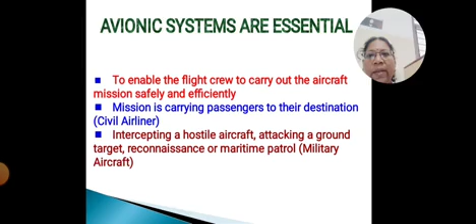If it is a civil type, what may be the mission? Mission means when you are taking that aircraft - if it's a civil aircraft, we have to carry the passengers very carefully and safely land them at a destination. If it is a military aircraft, it means intercepting a hostile aircraft, attacking a ground target, and we have to safely reach our target also in any weather condition. That is essential for this avionics system.

What are all the major drivers in the development of an avionics system? It is to meet the mission requirements with the minimum flight crew, we have to go for this avionics system.

What is that minimum flight crew? Suppose if you are having a civil aircraft, we know there will be a pilot and a co-pilot. If you are having an avionics system where a single pilot is enough to control the entire aircraft, that is an economic benefit - we are saving the salary of a crew, as well as reducing the training cost for another crew member. So we are reducing the cost and getting economic benefits.

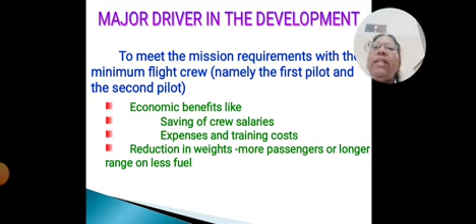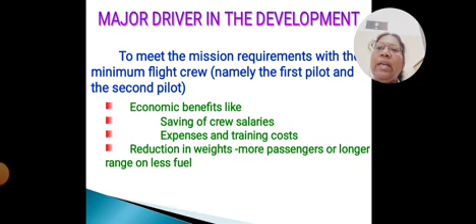Then we are reducing the weight of the flight. How? Since we are using electronic components instead of mechanical components to control the aircraft, the weight of electronic components is very less compared to mechanical components. Using that saved weight, we can take more passengers and reduce fuel consumption. That is the major driver in this one.

Then if it is a military type aircraft, a single seat fighter or strike aircraft is lighter. Since the weight of the aircraft is light, we can carry more weapons with this one, so its cost is less compared to a two-seat aircraft. Also it eliminates the second crew - so the second crew's training as well as salary can be reduced.

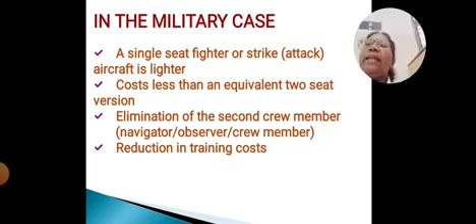Next, other important drivers of our avionics systems are increased safety compared to mechanical drivers. Here we are having an electronic system which gives accurate readings of our circumstance.

So we can safely land, and air traffic control requirements are comparatively less. At any weather condition, you can operate our flight, and it reduces the fuel consumption. It improves the aircraft performance, controls and handling, and reduces the maintenance costs.

So totally, the avionics system in the case of military helps us achieve our target. In the case of civil aircraft, we get benefits like reduced cost, and the economic benefits are more.

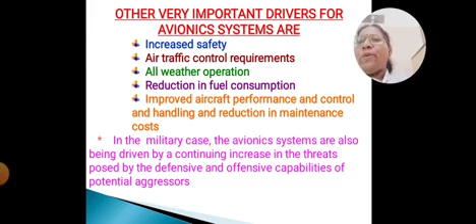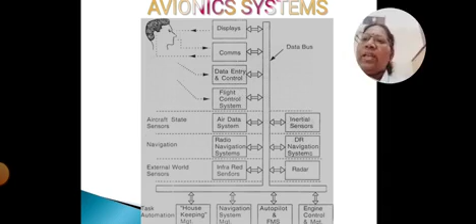Next, we are going to discuss the core aircraft subsystem. Here is the architecture of the avionics system. There is a pilot in front, with a display unit, communication units, and near his hands the data entry and control unit. Then we have the flight control systems. Majorly they have the aircraft state sensors, which give the air data systems, and inertial sensors. Then we have the navigation and radio navigation system.

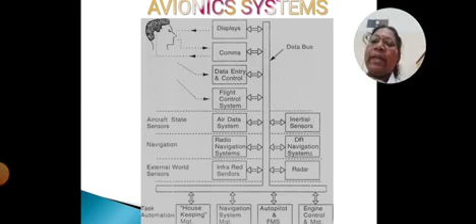In that, especially we have the DR navigation system. Then we have external world sensors that give radar data. Then we have the control systems: housekeeping system, navigation system, autopilot system, and engine control system.

Let me start with that one by one. The core avionics system is a hierarchical structure. It comprises layers of specific tasks and avionics system functions for enabling the crew to carry out the aircraft mission. When talking about this, we see it layer by layer.

When discussing the architecture, we have seen that there are so many layers. First is our display layer, then we have communication layers, and so many other layers. Let me start them one by one. What is the function of the display system?

It provides the visual interface between the pilot and the aircraft system. Visual interface means we have to get the data about where we are and where we have to land, and this data has to be displayed in the system. For that, we need display systems. There are three types: head-up display, head-mounted display, and head-down display.

Next, we have the communication system. It provides two-way communication between ground bases and aircraft, or between two aircraft. There will be a radio transmitter and receiver in each avionics system, so by transmitting messages or radio audio signals, we can communicate with the destination.

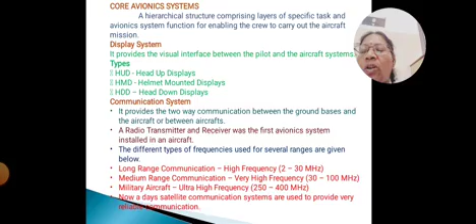Then the next unit is the data entry and control system. It is essential for the crew to interact with the avionics system, to give commands or to receive data, we need the data entry and control systems. Then the flight control system.

It uses electronic systems in two areas: first is auto stabilization, then fly-by-wire or flight control system. Auto stabilization means once you start from land, how you have to stabilize the aircraft, then control the aircraft towards the destination. That is controlled by this flight control system.

Then we have the aircraft state sensor system. This is a sensor system, and you already know the uses of sensor systems. Here we have the aircraft state sensor systems, used for control and navigation of aircraft.

Air data quantities are essential. To control the aircraft, we need data quantities like attitude, altitude, airspeed, true airspeed, Mach number, vertical speed, calibrated airspeed, and airstream incidence angle. These are all data we need to calculate the destination and where we are now, which can be calculated with this data, collected from the aircraft state sensor system.

For position fixing of the aircraft, we need radio navigation systems. Satellites or ground based transmitters transmit the signal, which is received by the receiver in the aircraft. After receiving the data, we can analyze where we are and where we have to reach. A supporting computer derives the aircraft position from the received signals. The primary position fixing system used in aircraft is GPS, which we use to fix the primary position of the aircraft.

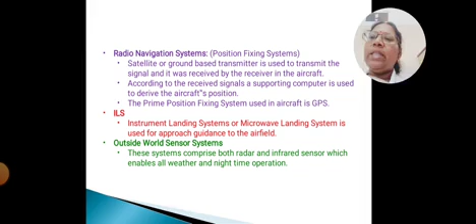This system comprises both radar and infrared sensors, which enable all weather and nighttime operation. Using radar, we can obtain data about objects before us, and using this, we can receive data in all weather conditions and at nighttime as well.

Next, the inertial reference system. The aircraft attitude and the direction it is heading are provided by the inertial sensor systems. Using this system, we obtain data like the heading direction, where we are moving towards, as well as the attitude of the aircraft.

Next, the navigation system. It provides navigation information like position, ground speed, and tracking angle. For this, we use dead reckoning systems or position fixing systems. These two systems calculate the altitude and position in navigation.

Next, types of DR navigation systems. Mostly we go with the DR navigation system, especially the inertial navigation system, which is the most accurate. Or else, based on requirements, we can use a Doppler or heading reference system, mostly used in helicopters, or we can go for an air data or heading reference system, which compared to the INS system has much less accuracy.

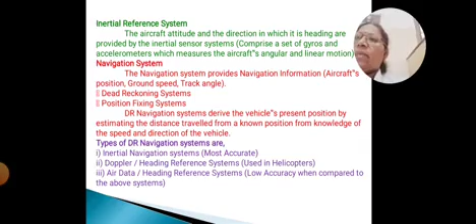Radar system: we use radar to detect water droplets, cloud turbulence, and warnings. We can get warnings about storms. Using this radar system, we can obtain all this data.

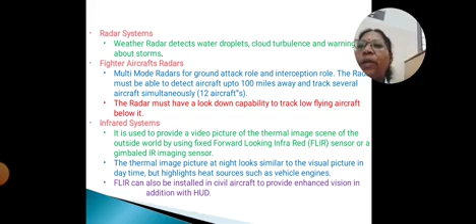For fighter aircraft, multi-mode radars are used for ground attack and to detect interception of other aircraft within 100 miles, so we can find how many aircraft are surrounding us with these fighter aircraft radars. The radar must also have a look-down capability to track low flying aircraft below us. This is all about the radar system we are providing.

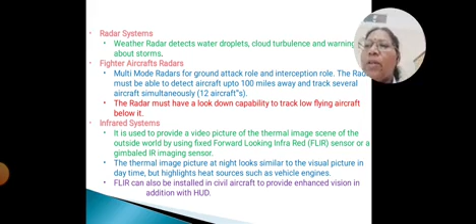Then we have the infrared system. It provides a video picture of the thermal image scene of the outside world using fixed forward looking infrared sensors or gimbal IR imaging sensors. Using these sensors, we can identify, based on temperature conditions, what objects are available there. The thermal images at night look similar to the visual picture in daytime. Using this, we can get more and deeper, accurate data.

Next, the task automation system. Task automation systems reduce the workload of the flight crew. Automatically, with the autopilot system, if we are flying a long distance, once we fix the destination, the flight will be under autopilot mode, reducing the flight crew's workload.

Then the navigation management system comprises the operation of all radio navigation and a combination of data from all navigation sources such as GPS and the INS system. It provides the best estimation of the aircraft position and ground speed, so by calculating the best position and best destination route, we can make accurate decisions.

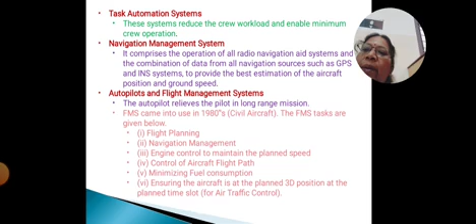Then autopilots and flight management systems. The autopilot relieves the pilot on long range missions. Flight management systems have been in use since the 1980s. They provide flight planning, navigation management, and engine control to maintain planned speed, control the aircraft flight path, minimize fuel consumption, and ensure the aircraft stays at a planned 3D position. These are all the uses of autopilots and flight management systems.

So far we have discussed all the core avionics architecture. Let me start with the next topic in the next unit. Thank you.